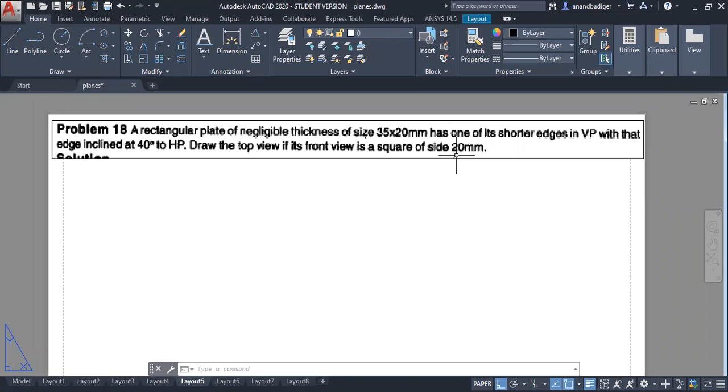So you can see that this problem is exactly the reverse of the previous problem we have solved. There in the top view it was looking like a rectangle of 30 cross 20. Here the front view is looking like a square of 20 mm. Because he has said that in the front view it looks like a square of 20 mm, it is a hint that we have to start the problem from the front view, not from the top view. Then only we can get this square of 20 mm in the front view. So that is the only change here. So let me just solve this question quickly.

So first the XY line. Because he has said that in the front view it looks like a square of 20 mm, I'm presuming that I have to start the problem with the front view, that is with VP. Coming to the question, it's a rectangular plate of 35 cross 20 mm, has one of its shorter edges in VP. So he's trying to say that the lamina is resting on one of its shorter edges in VP.

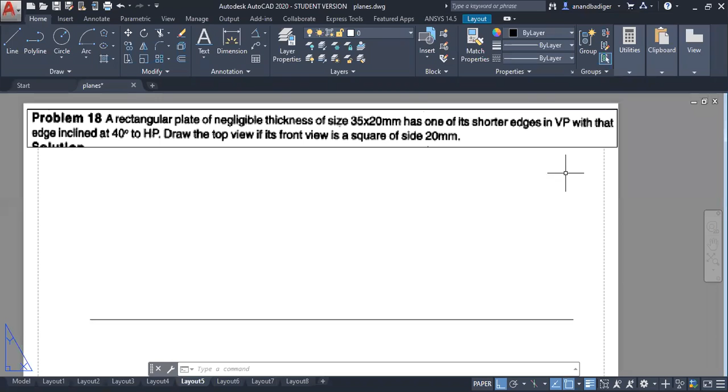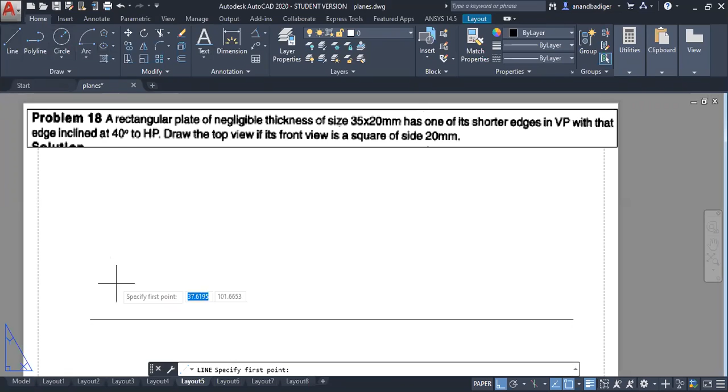So it means that I have to draw the rectangle in such a way that the shorter edge 20 mm should rest on VP. So I will draw the rectangle in such a way that 20 mm is on this side and 35 mm is on this side. So this is how the rectangle would look like, 35 cross 20. So 20, 35, 20, and then 35. Okay, so this I'm going to project.

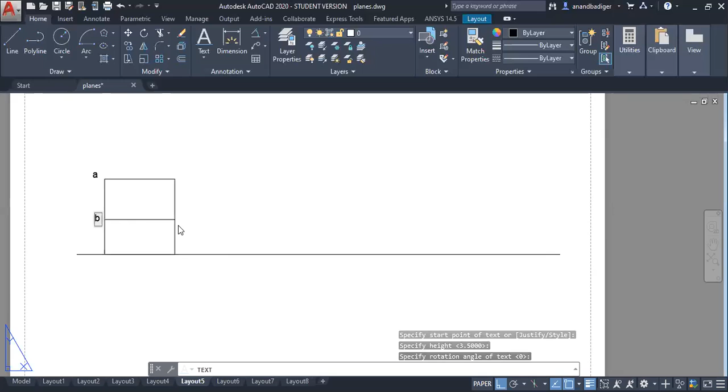So the top view here, because I'm starting from the front view, will be the top view of the line, which will fall on the XY line. So let me name it A, B, C, and D. Because this is the front view, it would be A dash, B dash, C dash, D dash.

Okay, so the top view would be here. Looking from the top, A would be visible, B will not be visible. So A with B in brackets, and here D would be visible and C will not be visible. So this is the front view, a rectangular lamina of 20 by 35, and this is the top view.

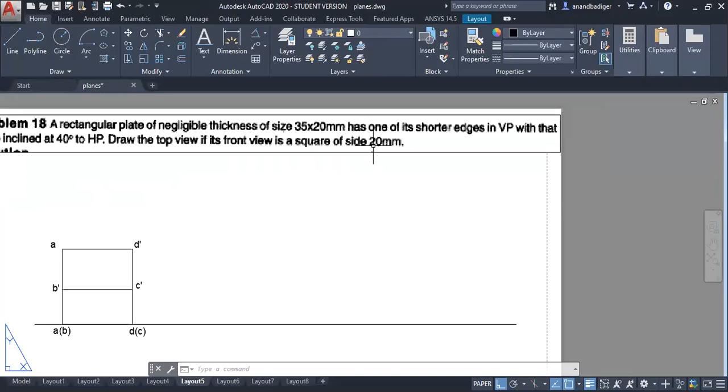Now the next case says that the front view looks like a square of 20 mm. Basically in the next position I was supposed to start with the top view, but I don't know the inclination with VP. That is why I have to start with the front view. I'll project the front view first, and from here I'll draw a square of 20 by 20. So that's the square of 20 mm sides.

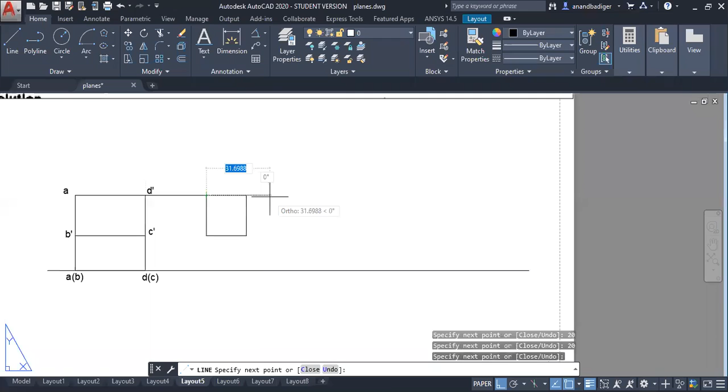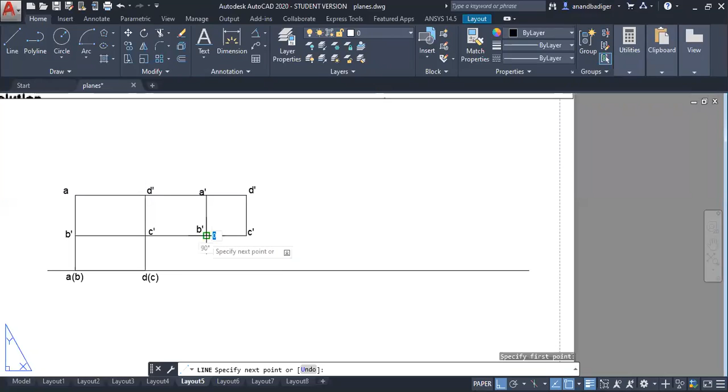Then from here I will take lines. Let me name it A dash, B dash, C dash, D dash. Now I'm going to project it for the top view. AB will come on the XY line because one of the shorter edges is in VP. Please look into the question: it has one of its shorter edges in VP. That is the reason I drew 20 mm on this side and 35 mm like this.

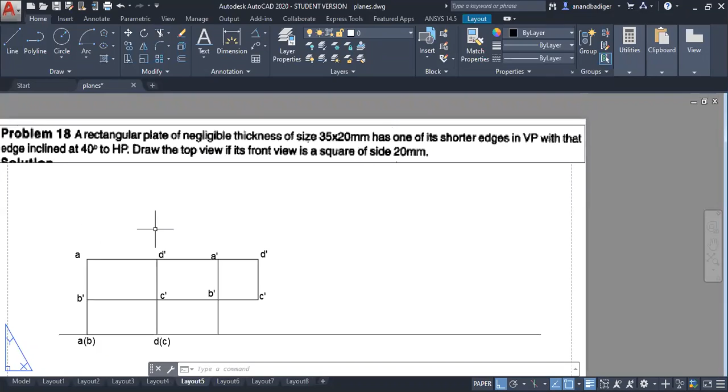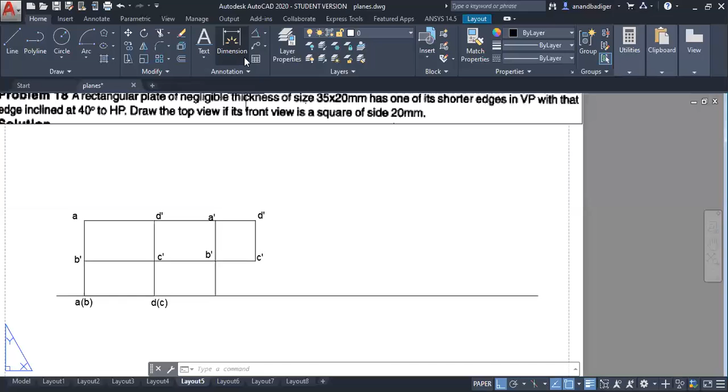If the question states that the longer edge is in VP, then you have to draw this rectangle the reverse way, such that 35 mm comes here and 20 mm comes here, so that in the second position top view you get the longer edge resting on VP. But currently it says the shorter edge, which is 20 mm. That is why you will get 20 mm on the XY line, and the longer edge will be away from the XY line. That is how you analyze which side to draw the shorter edge and the longer edge. So this would be A, B.

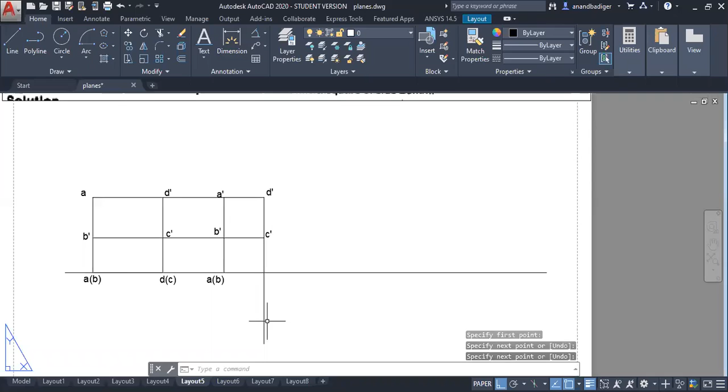And make sure the namings should not cross the XY line because it's a top view naming. So keep it in the horizontal plane only. So this line I will just project some length extra. So whatever length is here, same length arc I have to cut here. So I know this is a 35 mm length.

So I have to take center start end arc, and starting from here, I'll cut an arc of 35 mm length, 35. So that's the arc I have cut of length 35 mm because this top view measures 35 mm. So this I'll join it, right? So extra parts I will just trim it here. So these extra lines which are not required, I'll just trim it.

So this is going to give me the inclination with respect to vertical plane, VP. Okay, because the projection is falling on HP, obviously the corresponding angle will be of VP, because I have told you that VP's inclination will be shown in HP and HP's inclination will be shown in VP. So the inclination is 55 degrees. That is what it says.

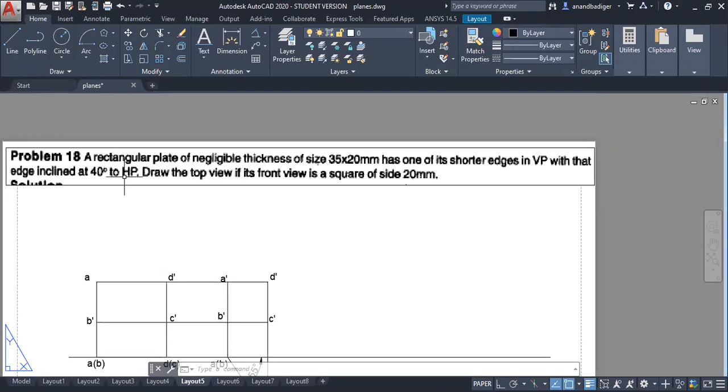Okay. Now coming to the final position, it says draw the top view. If its front view is a square of 20 mm, that is fine, we did. Yeah, the edge is inclined at 40 degrees to HP. Shorter edge which is in VP, that is inclined at 40 degrees to HP. So the shorter edge which is in VP is AB. So he's saying that AB is inclined at 40 degrees to HP, horizontal plane.

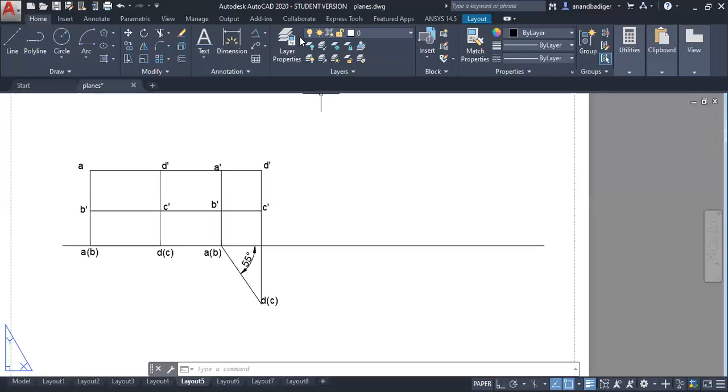So in the third position, as you can see, can anybody tell me now in the third position from where should I start? Should I draw you from top view or front view? Front view, sir. Yeah, you will start from front view because, as I told you, please remember if you are starting from front view, the sequence would be front view, top view, front view, then top view. That is how the sequence will go.

If you are starting from top view, that is if you are starting from here HP, then top view, front view, top view, front view, like this, like sinusoidal wave. You please remember that, there will be no confusion. So now I have to start with the front view such that the shorter edge A dash B dash is inclined at 40 degrees to HP. Okay. So this is VP, but here is where I'm going to show HP's inclination.

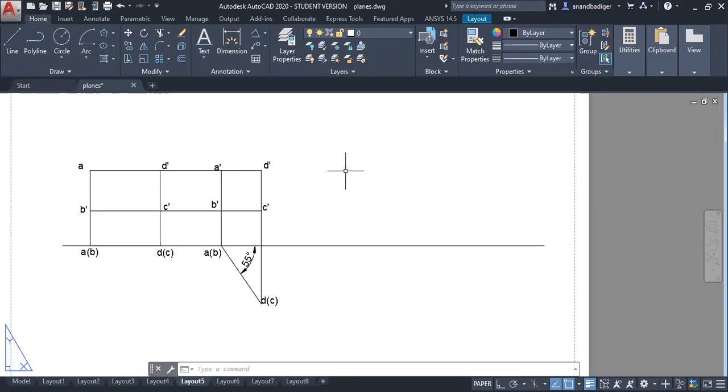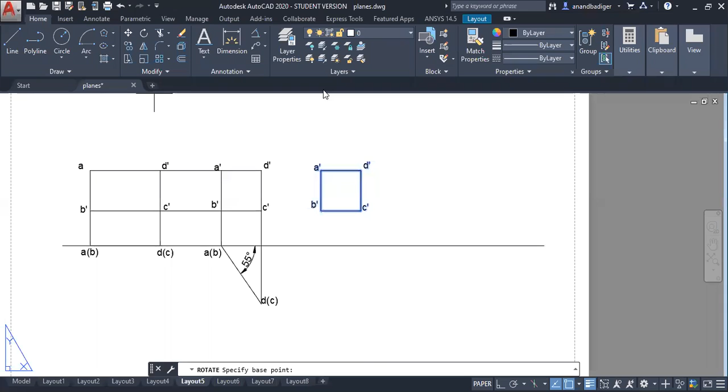So I'll select this square, just copy it. I'm just copying it so that I can directly rotate it to 40 degrees. Okay. So I'll just select this. Now the shorter edge which is in VP is AB. So I have to incline AB at 40 degrees to horizontal plane. So rotate, look into the rotate command. I'm fixing point B and rotating with respect to point A, or else you can do vice versa also.

So first I will click on point B, then I'll click on reference, then again I'll click on point B, then I'll click on point A. So this inclination what I should get here should be 40 degrees, 40. So 40, enter. So it has been rotated to 40 degree. So you can see that C dash has just touched the line. So let me move it a little bit above.

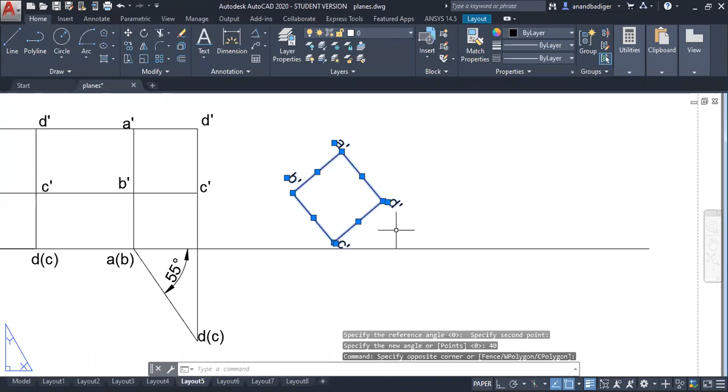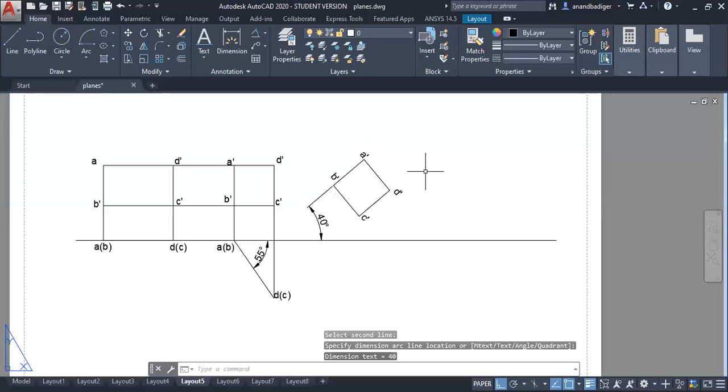Just select it, keep the ortho on so that the angle is not disturbed. Use the move command from under modify tab. Just select the square, then click any one point and just move it a little bit above. So I have not disturbed the angle by keeping the ortho on. So if you measure this angle, this should be 40 degrees. Okay, so this is inclined at 40 degree.

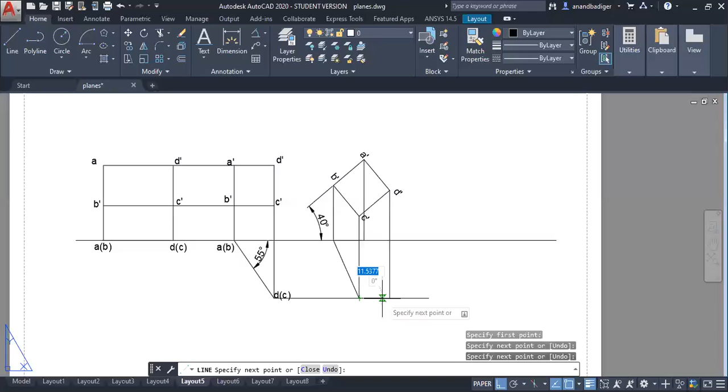Then final projection, you just have to draw here. So AB will be on XY line. So A, B, C, D would come from here. So this would be C, and this would be D. So now just join all the points, A to B, B to C, C to D, and D back to A. So that becomes your final projections of the lamina.

Okay, so naming it. So this would be B, A, C, and D. Okay, so this is how the solution you will get for the problem.